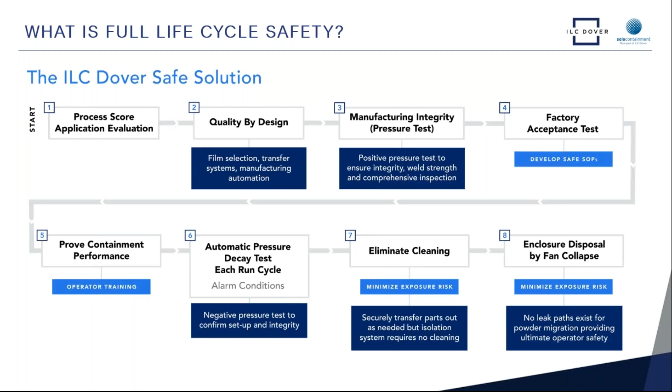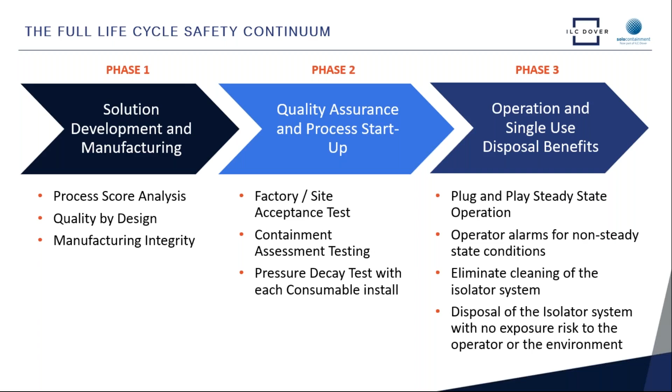Looking at it more simplistically, there are three phases in our full life cycle safety continuum: the solution development and manufacturing side, the quality assurance and process startup, and the operation and single-use disposal benefits. Let's look at it a bit more pictorially.

The process score. ILC Dover have developed a computer algorithm that allows us to look at the containment performance target, anywhere between 100 micrograms down to 10 nanograms. We look at the dust generating potential of the product you're handling. Is it not dusty? Is it very dusty? Is it somewhere in between? We look at the quantities of material you're going to handle, from grams to hundreds of kilograms.

And then we look at the process. Is it milling, high velocity parts spinning around? Is it something very gentle like sampling? These four factors create, on our algorithm, a process score.

The lower the process score, the more simplistic the isolator can be. The higher the process score, the more safety factors we've got to build into that flexible film isolator to bring up alarm conditions, to make sure we've got multi-stage HEPA filtration, and of course, this automatic pressure decay test.

The process score and our very detailed site survey questionnaires give us a basic understanding of your application, so we can then proceed to quality by design.

The design teams both at Frederica in the United States and here at Solo Containment in Manchester, UK, have got years and years of expertise behind them developing flexible film isolators. There are very few applications we have not conquered in our history working together.

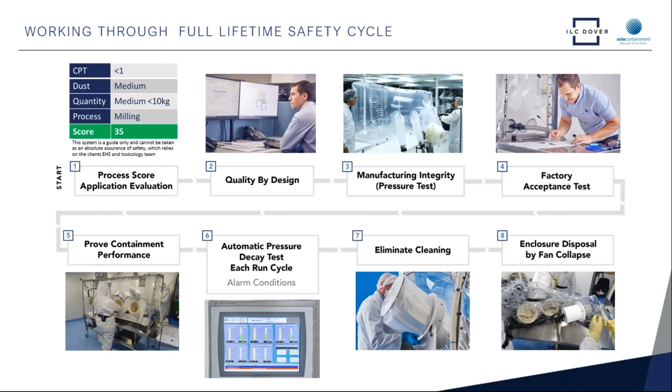Just let me talk about typical flexible film isolator designs. We need to create for you a secure and reliable containment bubble for your activities.

Here in this image from, I think, 2014, we have a single-use isolator that was used for product charging into a process vessel. You'll notice the flexible film base is sitting over the stainless steel table.

The stainless steel ports at either side are attached by very long sleeves, so at the changeover point of the flexible film enclosure, none of these parts will have seen any drug contamination, and that means it's very easy and clean to change over, no cleaning validation, and it adds to safety.

Just to bring to your attention, on this particular design, we had a PTFE transfer spigot that was considered single use, that carried the slide valve below the work table. You can just see there's a contained slide valve underneath there, and this was carried on a single-use PTFE spool piece. This particular enclosure was inerted by a Pall KLEENPAC filter with nitrogen, so it operated at a very low positive pressure. Obviously this is not suitable for high potency drugs, and it's limited to low hazard materials.

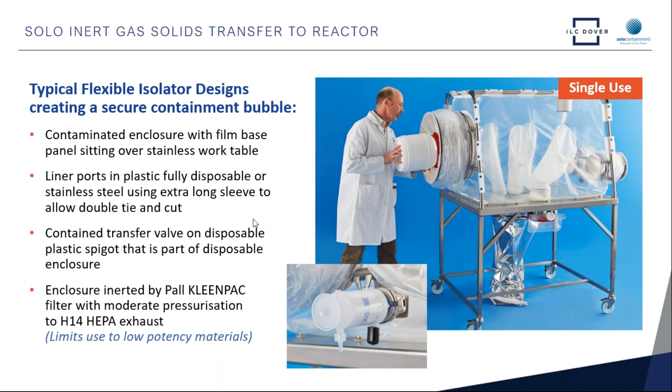Taking this a little bit further, here you see a more advanced isolator design. Here we're using a loading airlock to make it easy to get the product into the isolation chamber.

Double zip: one zip on the front to put the drum of material in, close that zip, and then using the glove sleeves we open the inner zip and we can start to dispense the product, as seen on the central image. So here the containment bubble is containing any API aerosol generated during powder dispensing, and of course that flexible film isolator will become contaminated.

So we make this single use. We make it so the HEPA filters that do the filtration, the continuous liner port, every single contaminated component of that isolator bubble can be collapsed by fan vacuum and rolled up for totally safe disposal. No aerosol escape is possible because we've got H14 filters on all sides of it.

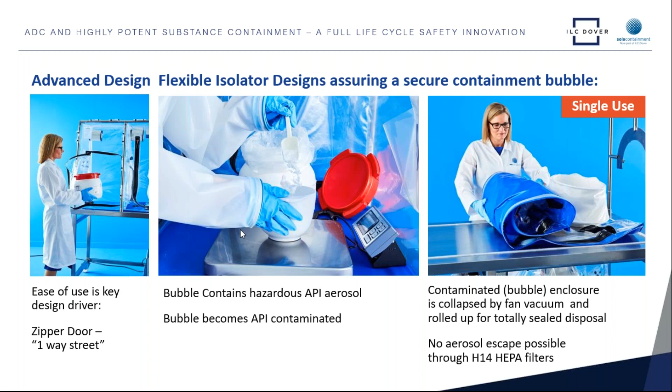Here's another example. Similar process, but this time we're targeting cytotoxic drug materials. This isolator is designed for adding cytotoxic powders into a compounding glassware vessel.

The compounding glassware vessel sits on a raised lower platform at the near side end of the isolator, and here we've got an extra long sleeve that goes around the glassware vessel, so at the end of the operation that glassware vessel can be overbagged and taken away from the flexible film isolator to a cleaning station.

Again, the entire isolator sits above the stainless steel table. So the table, the frame, and any active components involved in the manufacturing do not see any high potency API contamination. Any parts that do can be bagged out, like the glassware, through the extra length sleeve in the base.

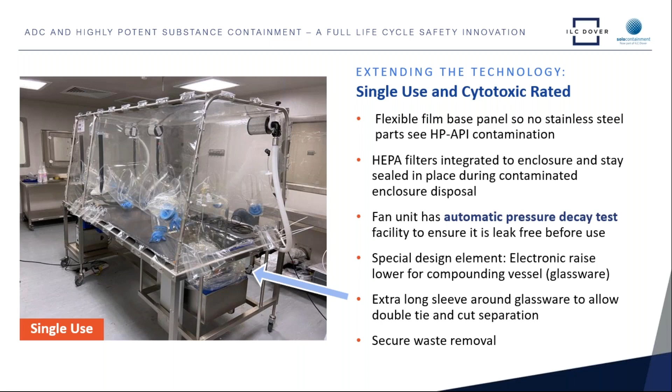This particular isolator operates with 3 H14 HEPA filters: one on the inlet, the central HEPA filter between the airlock and the powder transfer chamber, and on the right hand side, the exhaust HEPA. This exhaust HEPA is piped to the exhaust fan, where we have 3 electronically operated ball valves that control the automatic pressure decay test. So in this very simple design, meant for single use, we've got extremely good levels of containment performance. That's the typical layout of the isolator.

We can see the compact design, less than 10 feet long. The work chamber is about 5 feet long, and we've got gloves so operators can work from both sides.

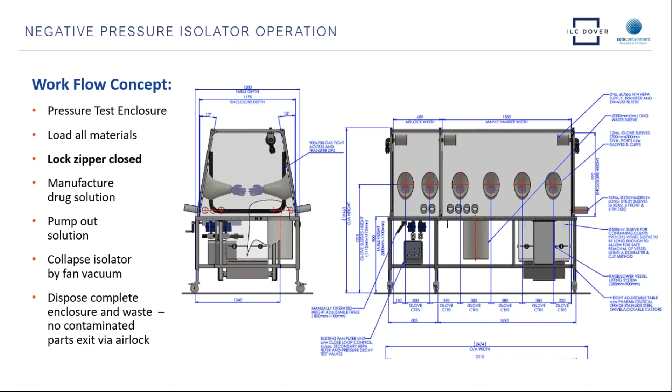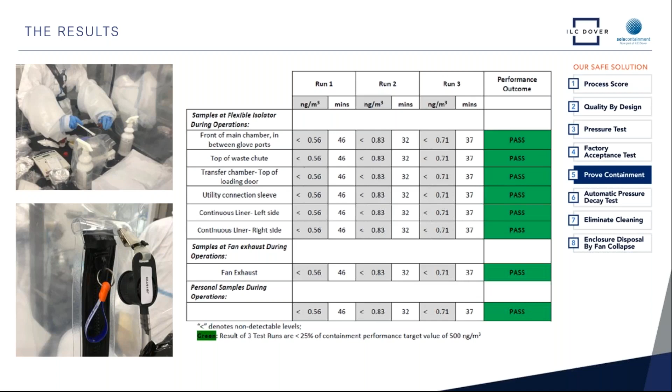This isolator was tested in June of 2019 using the SafeBridge team in the UK, and the actual performance characteristics we got from this single-use isolator were extremely good. Every single test run we took on the powder handling and static samples were below the limit of detection. This client opted for a previous version of EN689, where the pass-fail was 25% of the containment performance target, which in this case was 500 nanograms. So in all cases, the containment performance was sub-nanogram. Very exciting, we're very pleased about that.

The Solo ADC is designed for handling products with a typical containment performance target of below 10 nanograms. Extremely toxic materials, very dangerous, and with this sort of product we cannot afford to take any chances.

So the control package for the Solo ADC, what we call the gassing tower, has various functional alarms on it. For example, the airlock has a proximity switch on it. Even though it's a flexible film zipper, the proximity switch on the airlock will go into alarm if anybody opens the airlock during the manufacturing campaign.

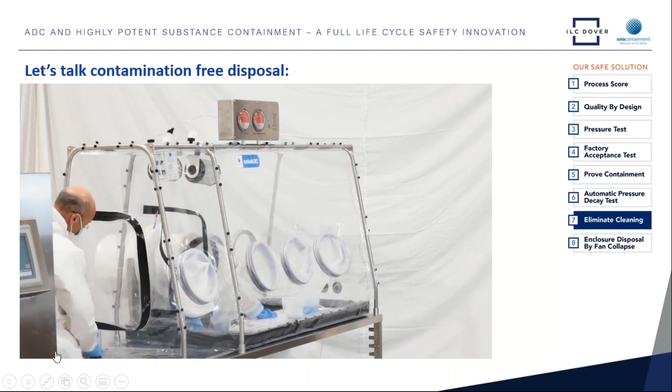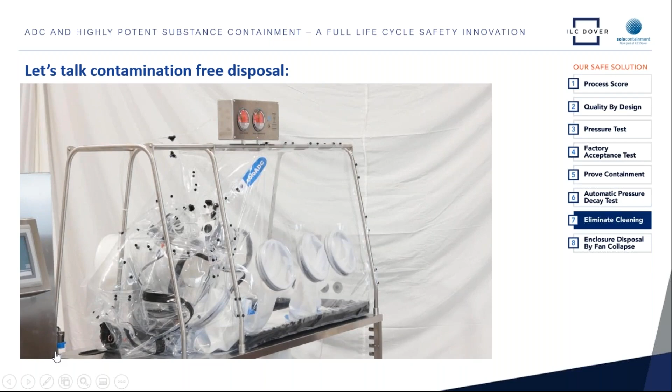Now let's talk about how we achieve contamination-free isolator disposal. This is a little time-lapse image. What we're showing here is that at the end of a manufacturing campaign, when the flexible film isolator enclosure is potentially contaminated with an ADC toxin, we want to be able to get it off the frame without causing any positive pressurization of that flexible isolator. Using the fan exhaust, you can see how it collapses the isolator down very easily.

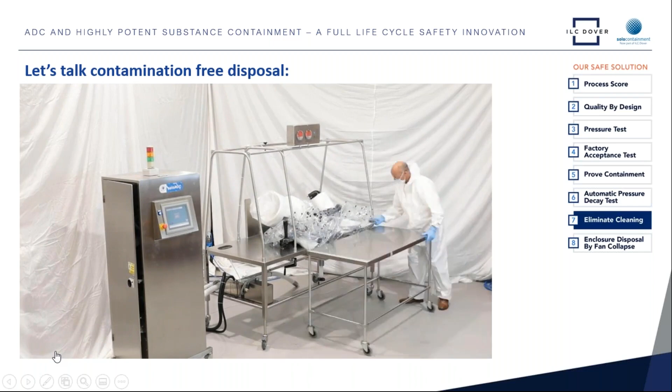Now we're just going to lift out the two-stage exhaust HEPA housing from the back. There it is. Slide the contaminated enclosure onto the trolley and take it for disposal. Very, very simple, very effective.

This design was developed with our customer ADC Biotechnology, based in Wales in the UK. We manufactured 2 isolators for them in 2018. You can see our design has come on a little since then - we've got the gassing tower and different control valve technology. But even back in 2018, the containment test data we got from the Solo ADC was absolutely outstanding.

We had a containment performance target of 10 nanograms per meter cubed, task specific. Our pass-fail was 10% of that, so we had to be better than 1 nanogram per meter cubed, task specific. Our customer wanted a very wide range of tests done, because we wanted to account for every potential adverse condition.

So the first thing we did was spend an entire day removing contaminated items through the continuous liner, and we deliberately put naproxen sodium parts, contaminated parts, into the continuous liner pouch. We shook it about, made sure it was as dusty as possible, and then heat sealed it off - we'll show you the heat sealer in a moment. But all 3 of the results, both personal and static, across 3 runs, were below the limit of detection.

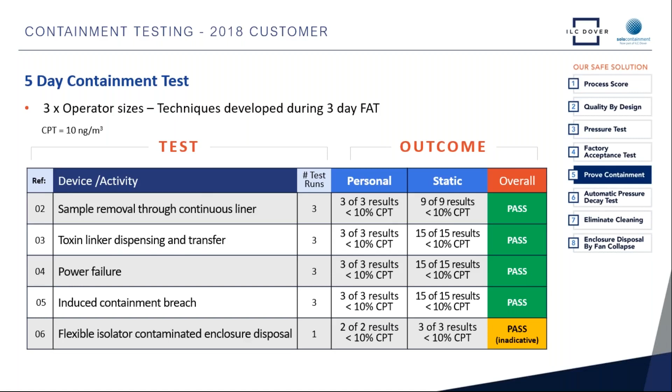Now, as part of our full life cycle safety evaluation, we're going to use the factory acceptance test to develop good SOPs. And our client, ADC Bio, really did do an excellent job with the FAT. So they had 5 people come down to the factory for the FAT. Instead of a typical 1-day FAT, I think it went over 3 days.

Every single procedure was rehearsed by different people. It was recorded on video, it was written up. So they had a policy of, if you will, really benchmarking how to do every specific activity within the isolator, and as if they learnt it by rote.

It was extremely good. Add to this the full disposal, the totally disposable features in the Solo ADC. You can see the HEPA filter housing on the left is made out of plastic. No changing the HEPA filters. The entire thing is disposed of. It's sealed to the flexible film enclosure.

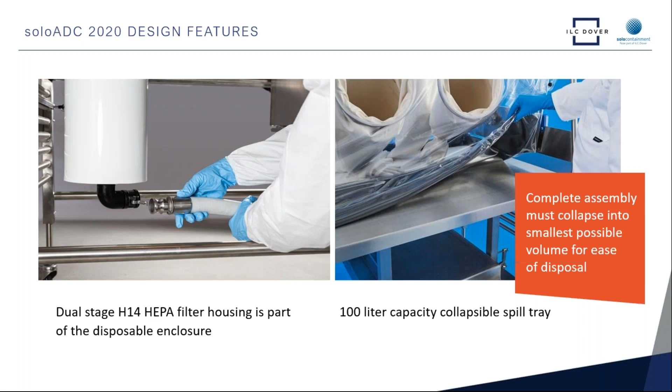And the spill bund or spill tray in the main work chamber, 100 litre capacity, but it's made out of soft EPDM film, so it rolls up when the flexible film containment enclosure is rolled up. It doesn't hinder any compacting down of the volume because we're targeting the lowest possible volume for easy disposal.

Here we have the heat sealer. There's a nice little video available from ILC Dover that shows this heat sealer in use.

Now, why do I like heat sealers? Well, of course, crimping technology is common with many continuous liner systems. You know, crimping on a good day is extremely effective. Now, when you're dealing with ADC toxins and you're targeting a 1 nanogram exposure limit, that's pretty much like the sort of pollen haze you'd get on a bad hay fever day. You can't see it. With pollen, it would give you the sneezes. With an ADC toxin, probably the effect it would have on you would be far more harmful.

So we need to look at a method of chopping down the continuous liner that is, if you will, bulletproof. And we've sourced a toxic dust heat sealer. The toxic dust heat sealer makes 2 weld lines, and there is a cut line right in between the 2 weld lines. If there's any residual toxin powders in that liner pouch when it's cut off, they'll be submerged in melted polymer.

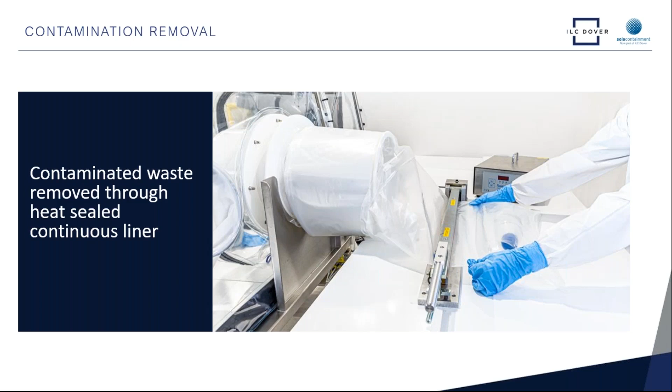And on the video that we've just released, you'll see that when we swab test the cut off pouch that's heavily contaminated, there is nothing coming out. We're using a UV material, UV fluorescing material and UV light to prove there's no migration after the heat.

Now, we've talked about several areas of our full life cycle safety innovation. An isolator isn't going to be very productive unless we can get product in and product out. So what I want to talk about now is the various options to transfer products and materials through the containment bubble to make it work for your process. This is part of our quality by design approach. Early on in our discussions with you, we'll have done the process score and know exactly what size containers, batch sizes, and operational characteristics you have in your facility, which allows us to look at the various containment transfer types available.

I'm going to go through a few. One of the best established systems is the DPTE system, also called an RTP, rapid transfer port. These have been around for about 50 years. They were pioneered for aseptic processing because they allow you to bring aseptic materials in a transit container into an aseptic isolator without the need for any interstitial decontamination. The lid of the transit container and the lid of the isolator door seal together so that any microbial contamination cannot get into the aseptic isolator. Here we're going to use this kind of DPTE system for getting products into a containment isolator running at negative pressure.

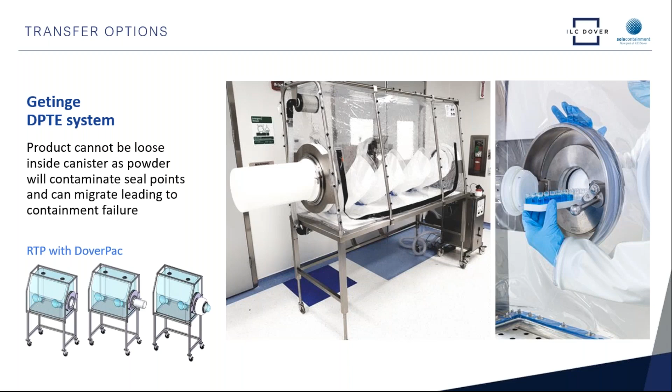Now, one of the very practical ways of powder handling is to use a split butterfly valve. Split butterfly valve technology has been around probably since the early 1990s, and there are several very good suppliers out there that make excellent technology. Split butterfly valves are available in sizes from possibly 2 inches to 12 inches diameter. Lots of companies make them. Some are fully automated, so they dock, open, and close again at the end of the transfer.

Very good systems, particularly in the field if you're doing direct transfer of a product into an IBC bin, or you want to get product into a process vessel. Split butterfly valve technology is available with a wide range of solvent and chemical resistant sealing technologies and gaskets, and it is very versatile for that chemical plant environment and indeed many other environments. So solid technology, very reliable.

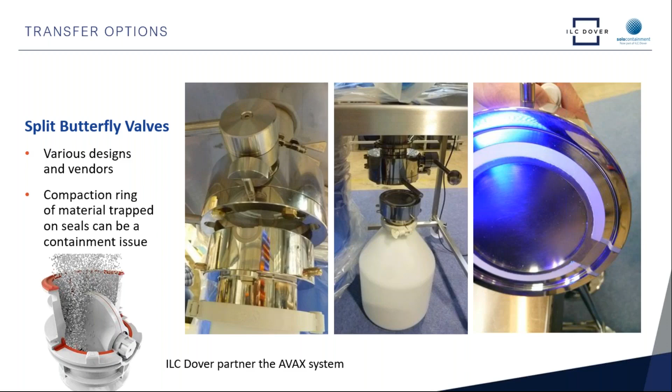The contained slide valve operates with a full bore transfer, and many customers put a feeder funnel right down through the open valve before powder is applied, to keep the internal surfaces completely powder free. Benefits: relatively low cost, single use in the injection molded versions, and fairly good containment performance.

For many years in flexible film isolator technology, bag-in bag-out canisters have been the norm, and these are still extremely effective. One of the great benefits of the BIBO canister is if you're operating in an inert gas environment, you do not dilute the gas environment by introducing air as you would with an airlock transfer system. So it's often seen in chemical plants where we're using an inert atmosphere to suppress any ignition tendencies at a reactor charge or vessel charge point.

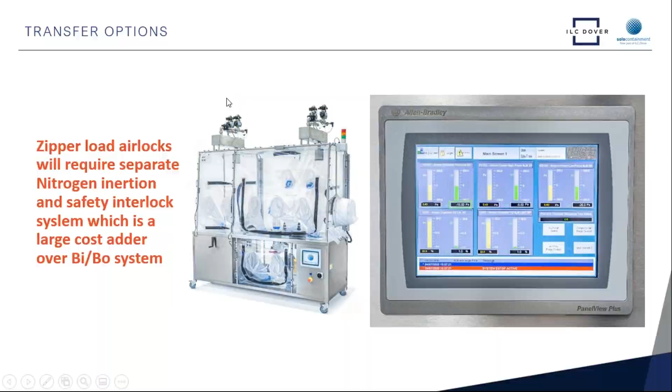One of the final parts of our full life cycle safety innovation is this elimination of cleaning. So let's look at some fairly good examples of how we can work towards this.

For example, when we started our pathway with isolators for ADC manufacturing, some of our early customers were removing their electronic balances through a transfer sleeve liner to decontaminate them between batches. Now, with a product that has a 10 nanogram exposure limit, we didn't think that was particularly safe. So after doing some research, we found a very cost-effective two-place disposable balance. On the left-hand picture you can see the yellow fascia of this, called an A and D balance, manufactured in Japan, about $300 a time.

So in this particular ADC isolator, we're using a battery-operated balance, which we consider disposable, and a battery-operated magnetic stirrer. All the manufacturing componentry - the balance, the stirrer, even the glassware - we're considering consumables, so we don't have to take them out and do a cleaning task.

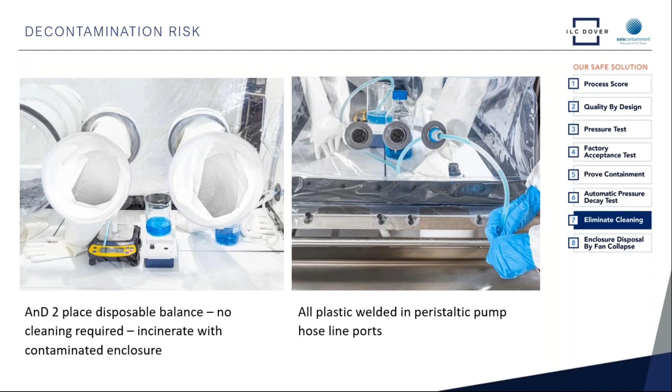Similarly, with the peristaltic pump lines, where once we may have used tri-clamps and a stainless steel base pan, we've now advanced our technology at Dover, so we're using fully welded plastic peristaltic hose lines. We're using an EPDM soft film base tray instead of a stainless steel base tray, and all these steps eliminate the need for cleaning, reduce decontamination risk, and reduce the risk of an operator becoming contaminated during cleaning.

The base plates that sit above the EPDM liner are what we call a crack fold system. These are 9mm thick plastic base trays that are machined 70% of the way through on the underside, so when you want to dispose of that contaminated enclosure, they snap down into extremely small parts to reduce the disposal volume.

The heat sealable continuous liner is mounted on an incinerable plastic spool piece, which is clamped through the film, so at the end of the campaign that lifts off. We class it as a consumable part. Not only does it reduce any risk of dismantling during strip down, it also saves time, because when you're putting your new flexible enclosure on, there you go, the liner's already mounted on the spool piece, ready to go, and you're in business more quickly.

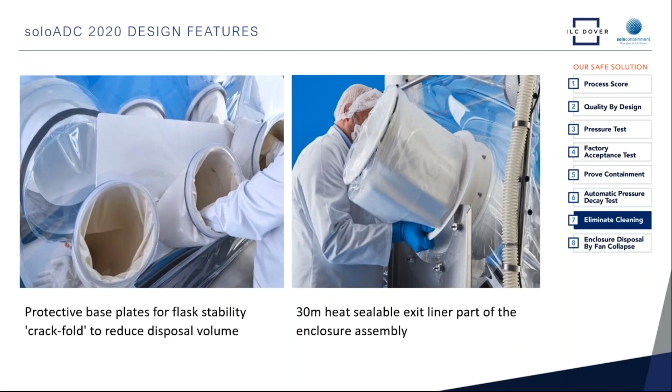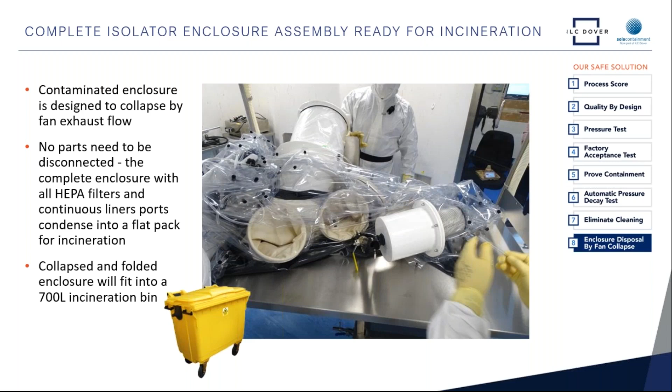There we have a complete isolator assembly, a contaminated assembly ready for disposal. This was at the end of the 5-day containment test. That flexible isolator fits into a 700-litre incineration tote. We have developed designs that will even fit into a 200-litre Mauser drum. So if we can get to work on the componentry, we can make the incineration very cost effective. But this is a partnership that we cover down at the quality by design stage.

One of the things we've touched on here, by eliminating cleaning, by making our system single use, we believe we save our customers significant revenues during the course of a manufacturing year. Let me just explain. So supposing we've got a 100 nanogram containment product, one way of doing this would be to buy a rigid stainless steel isolator. Now, rigid stainless steel isolator for this kind of application, let's say the price is $775,000.

The ILC Dover solo ADC isolator, to do that exact duty, would be about $70,000. So we've got a fairly huge price saving there. Now, let's focus a little bit on the consumables.

The consumable costs on a rigid stainless isolator, we're thinking about HEPA filters, gloves, gauntlets, gaskets, seals. Let's say they come to $2,000 every campaign change. On a flexible film isolator, a little bit higher, a little bit more intense, because every single component is disposed of. So with a flexible film isolator, typical cost for the complete kit is $10,000. Okay, so seems a little bit expensive, but let's just look at the cleaning validation.

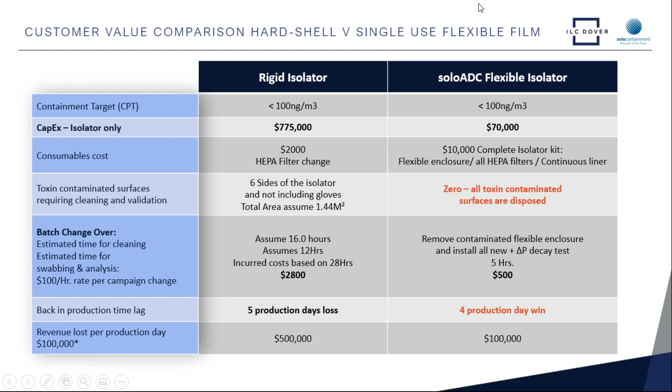So that's about $500 worth of labor time there, but more importantly, you're back in production 4 days faster with the Dover system than you would be with a rigid stainless steel isolator. So the cost of production is a single day hit of $100,000. Now, multiply that up by 6 manufacturing campaigns in the course of a 12-month period, and the savings with the single-use technology are enormous.

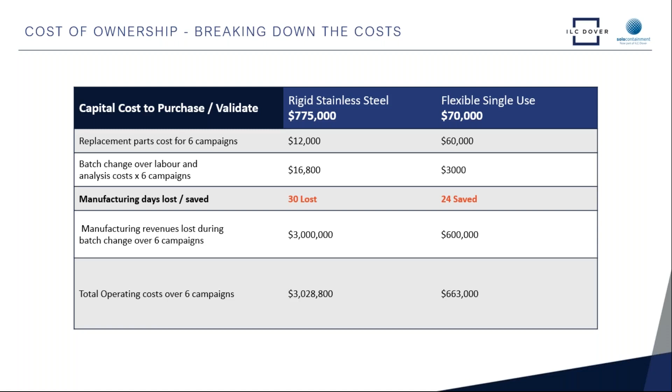With a rigid isolator, you may lose 30 manufacturing days, which has a rack-up cost of over $3 million. With a single-use system, we're saving you 24 days manufacturing time, even with our perceived to be expensive replacement kit. The total cost for operating over 6 campaigns is, say, $663,000. Huge, huge saving.

So our conclusion. We believe that a well-designed flexible film containment system delivers equivalent, if not better, containment performance than a hard shell isolator. And because we back up our flexible film technology with this full life cycle safety innovation, we manage the complete risk profile, from assessing the risk and hazard at the outset with our process score, quality by design, by using our years and years of experience and expertise to leverage the best solution for your application.

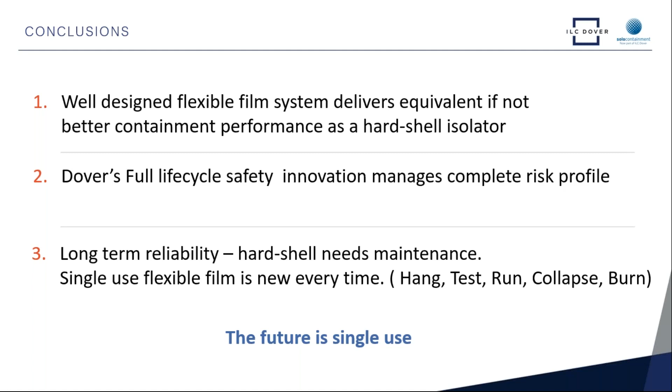And then, of course, we've got long-term reliability. Hard shell isolators need maintenance. Single-use flexible film, it's new every time. You take it from the 3-layer pack, you put it on the frame, you do the pressure decay test, you run it, you collapse it, you incinerate. We believe there is a massive, massive benefit in single-use technology.

So, my friends, in conclusion, at ILC Dover, we believe our full life cycle safety approach sets a new bar in the field of containment technology, because from the very beginning to talk to you about your application, to going through the factory acceptance test, to partnering with you on SOP development, and then we've got all of our very neat disposal systems, we think we're adding layer upon layer of operator safety in your facility.